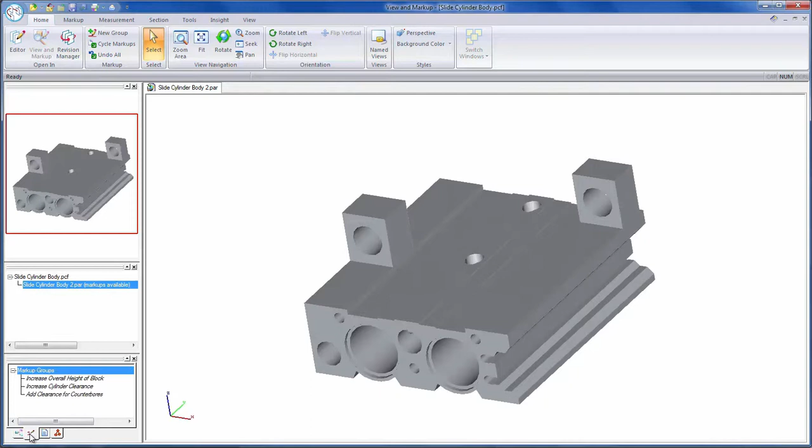Design intent is the intelligence we as designers build into our CAD models so that they'll change predictably. The issue is, in a history-based CAD system, nobody knows what the intent is other than the original designer. This could prove to be problematic if the designer is no longer available or doesn't remember how the part was put together. To illustrate the problem, we've been sent some markups to make to this old part.

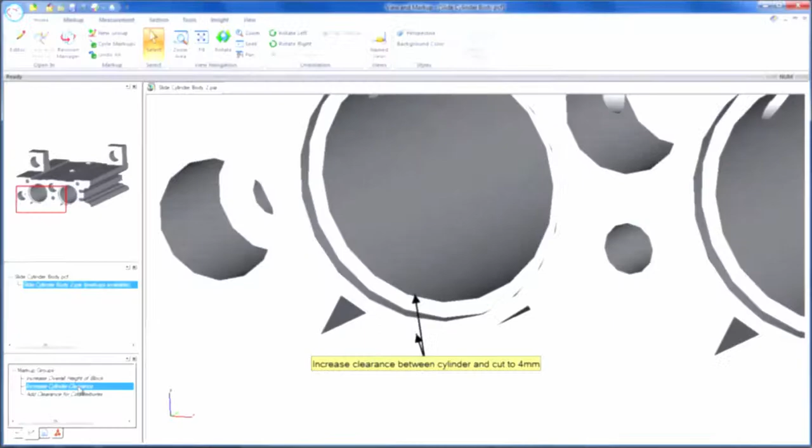For our first change, we need to add some extra material to the slide in order to create additional clearance between features. We have instruction to change our slide body to an overall height of 31mm. The second change is to increase wall thickness between the cylinder slides and the cutout to 4mm, as we're seeing some problems with deformation. And finally, we need to add at least 2mm of clearance between these counterbores, as our new manufacturer is reporting a blow-through risk.

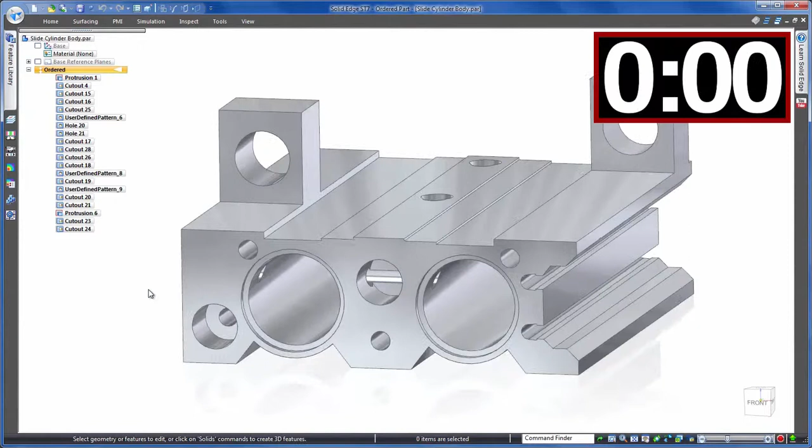First, we'll attempt to make these changes like you would with most any other CAD system, using a history-based approach. Then, we'll make exactly the same changes using Synchronous Technology. So first, history-based, and to help compare, let's set a timer going in the top right. So for the first edit, we click on the model to edit the sketch of the highlighted feature, assuming this is the correct feature. Luckily it is, and we're also lucky that we have a fully defined sketch with a dimension of the geometry that we need to change.

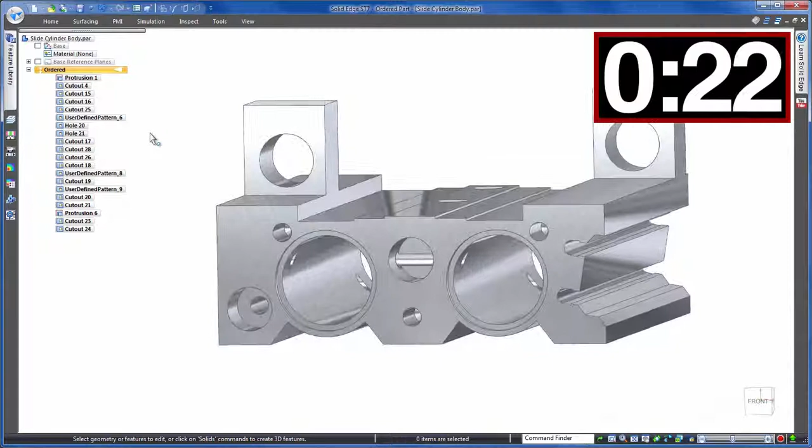We'll change this to 31mm as required, the sketch is updated as we'd expect, and then rebuild the model. We have a problem. Due to inappropriate design intent, this cut on the right has shifted, so we need to go in and fix this by editing the sketch relationships. Only a minor issue there to resolve, 34 seconds of editing, but let's do the same revision using Synchronous Technology.

Timer restarted in the top right, and for this same change, all we need to do is place the required dimension in 3D, no sketch work in sight. Solid Edge has recognised the design intent of the geometry here. It sees that there are quite a few faces to keep in line. However, as you can see, we can intervene on the fly if we wish. Solid Edge was right the first time though, and furthermore, notice that we're able to keep the model symmetrical. No issues about fixed origins or coordinate systems, 22 hassle-free seconds.

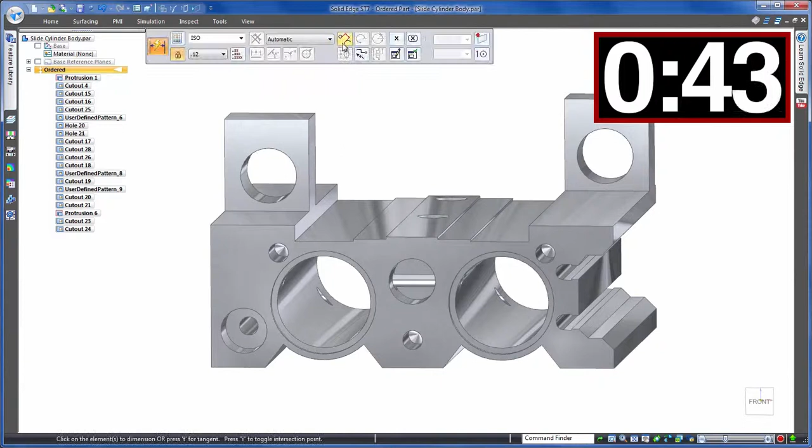Back to history-based for the next change, and before we make any edits, we need to find out how much material we currently have between the cylinder and the cutout. Measuring it finds it to be 2.5mm. We need to make this a total of 4, so we'll add 1.5mm to the radius of the cut. Again, we'll go in and edit the sketch of the feature and use Solid Edge's ability to enter equations in the dimension box to simply plus 1.5mm. Rebuild the model and...

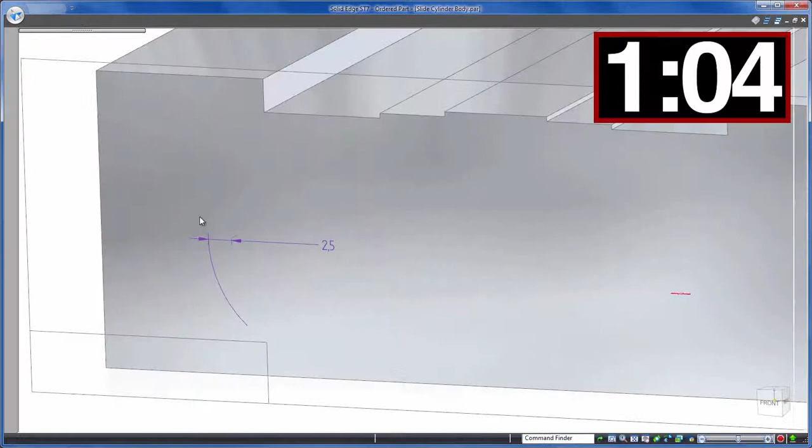it's clear that the original design intent wasn't set up for this type of change. We now have interference with our slide positioning holes. So let's undo that change and go back to the sketch to correct the design intent. We'll speed through this to save you falling asleep. Okay, sorted, and we're at 1 minute 34 seconds.

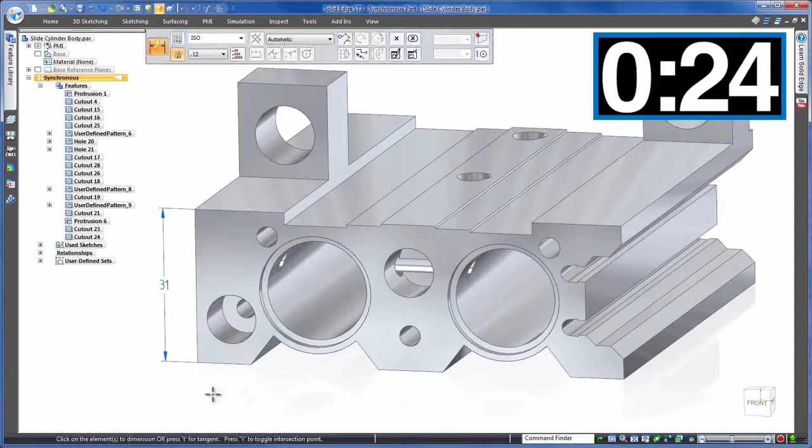The same change using Synchronous Technology, and dimensioning the two radii here isn't limited to just taking a measurement. Instead, we can immediately type in the 4mm clearance value required. As for design intent recognition, not only does Solid Edge allow us to add material rather than shifting the cylinder slides up, but it also recognises that we'd want the other side of the model to change too, as it's symmetrical.

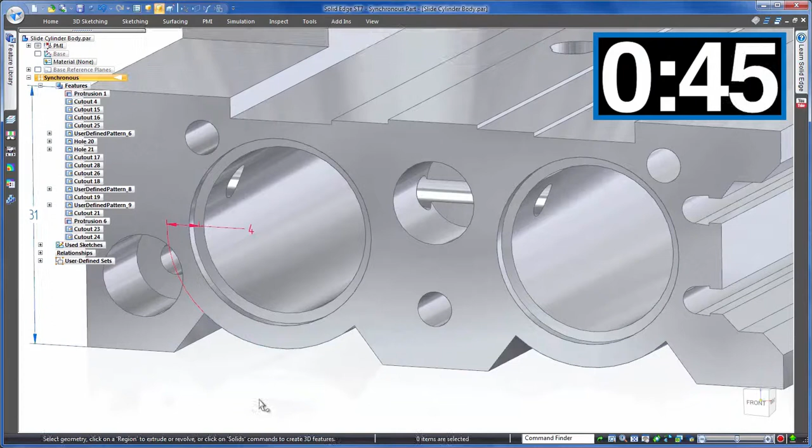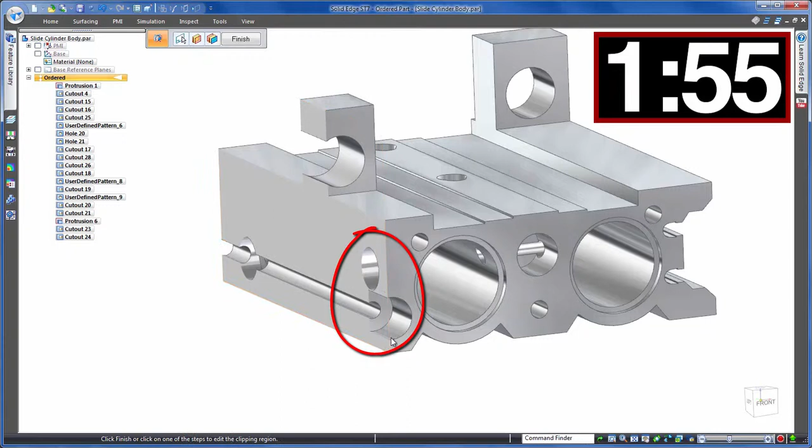Now for our final revision, and back to a history-based approach for the last time. In order to get a better idea of what we're working with, we'll create a section view through the model so that we can get a better understanding of where that blow-through risk is. Okay, here it is. So we'll be editing these two counterbores, and let's take the lower one first. We'll go into the sketch and modify the dimension that's controlling its position, subtracting 1mm. Again, we'll use the equation in dimension box method for ease.

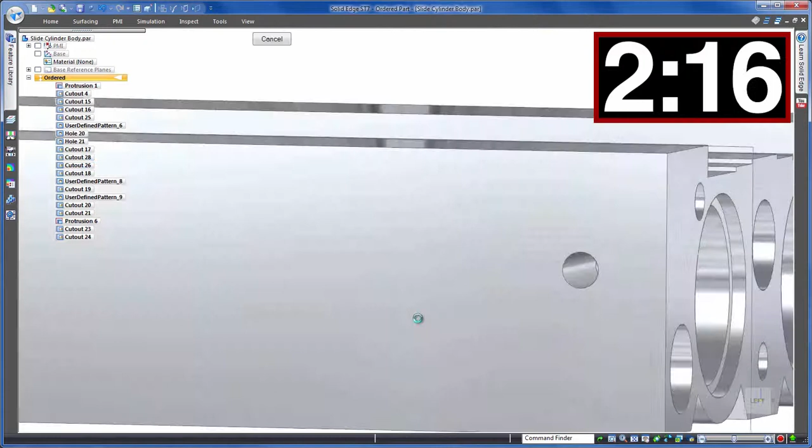We need to do the same with the top counterbore to total our required 2mm clearance, but repeating the same steps, notice that this wasn't created in the same way as the previous. Instead, it has two cuts, one concentric to the other. These sorts of frustrating situations are often run into in history-based modelling. Design intent may not be what you'd naturally expect. It's all down to the original decision and creation. Another fix required.

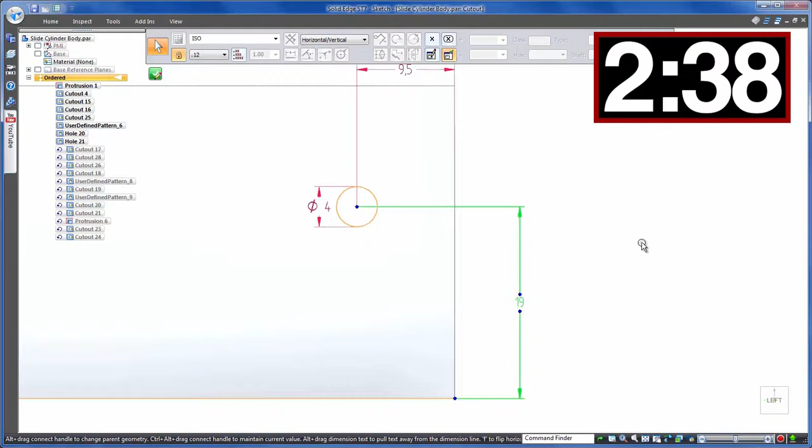Re-examining our part to make sure everything is how we need it. Notice that we now have an issue relating to the rear counterbore. It doesn't line up with the front counterbore we edited earlier. Again, the setup of the original design intent means that the model hasn't changed as expected, so time for another fix. We'll speed this one up too.

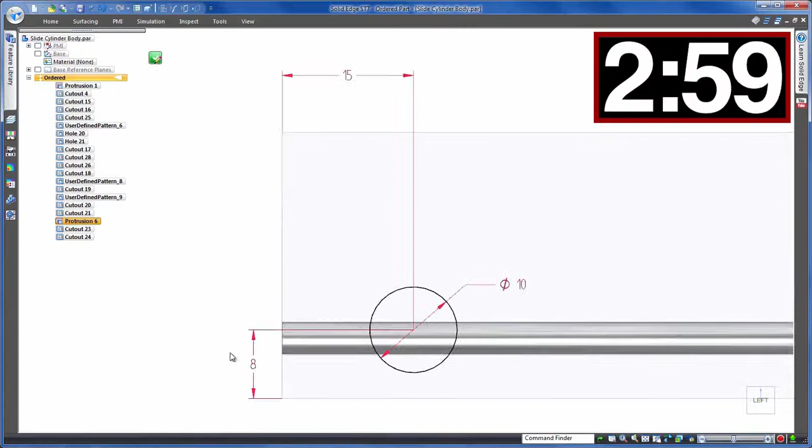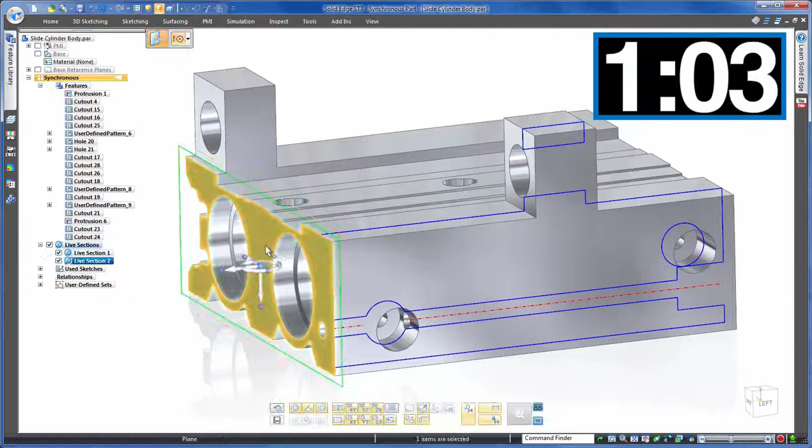And this same final edit using Synchronous Technology, we'll remember the section view that we used in our history-based approach. Well, check this out. Synchronous Technology automatically creates sketches at that particular section, allowing us to use those to drive the model. And as it's that easy, well, let's add 2 sections. We can even hide our part so that we're left with an unobscured view for our required edits.

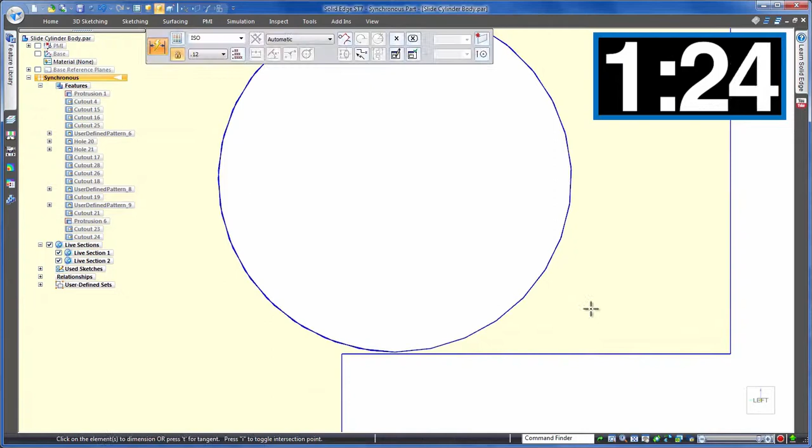We can then simply drag this profile to see how the design intent is being taken care of, which of course is modifying all of the solid geometry in the background, or use precision tools to make the edits. We use the same dimension tool we've been using all along to add 2mm, or round to 2, as we can now more clearly see the overall geometry. But what about that rear counterbore? Well, no problems here. Solid Edge has recognised the design intent of keeping these aligned, and of course you have the freedom to intervene if you wish.

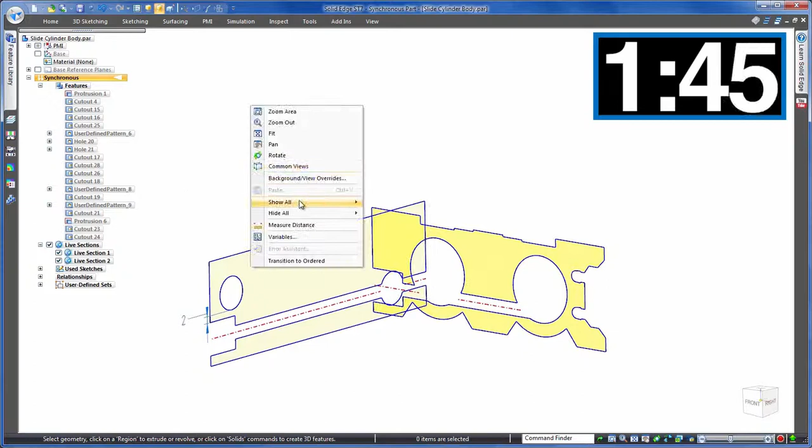All changes done. Let's see how the times compare. 3 minutes 37 seconds for history-based and 1 minute 45 seconds for Synchronous Technology. Both small numbers for this simple example, but that's half the time using Synchronous Technology. And it's not just about time, it's the removal of the guesswork, the tiresome interrogation and modification of the original design intent. Synchronous Technology in Solid Edge recognises and maintains design intent on the fly, of course with freedom to change, allowing for sensible and predictable edits.